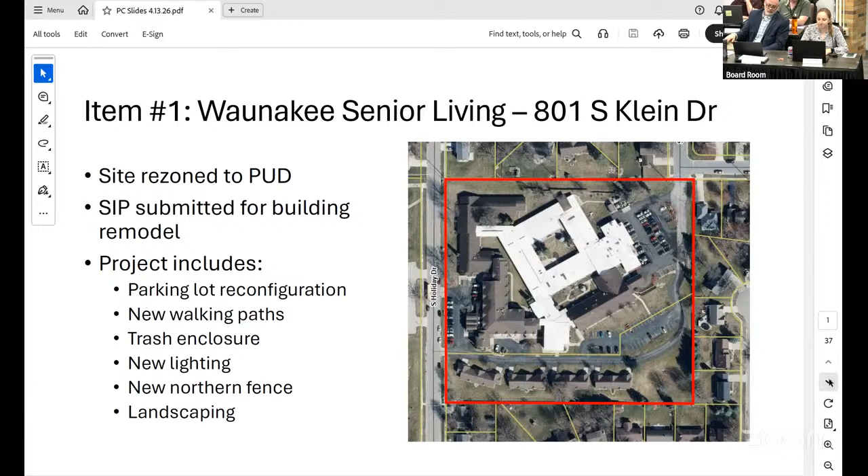I think you've seen this before, but this is kind of a very zoomed out version of the site plan itself. As you can see, there's no additions to the buildings, but there are some reconfigurations inside with these kind of courtyard areas, as well as the parking lot will look a little bit different than what it currently looks like, and also some new walking paths throughout the campus.

I also included kind of zoomed in versions of the 4 quadrants that were included in the site plan so you can better see exactly what's going on here. The major change in this southwest quadrant is this kind of entrance area - it's a drop-off area for the facility, as well as some additional walking paths.

And then the southeast area, the parking lot has changed a little bit, and there's a stormwater management area here in the middle, as well as additional walking paths.

And then in the northeast section, the parking lot is reconfigured again. Currently, it's kind of one block. Now it has a stormwater management area in the middle of those 2 parking areas, as well as a kind of pedestrian connection from the development up to walking paths, including this northern sidewalk that was mentioned by some of the public comments here. That does not exist currently, and so that would be an addition as part of the project.

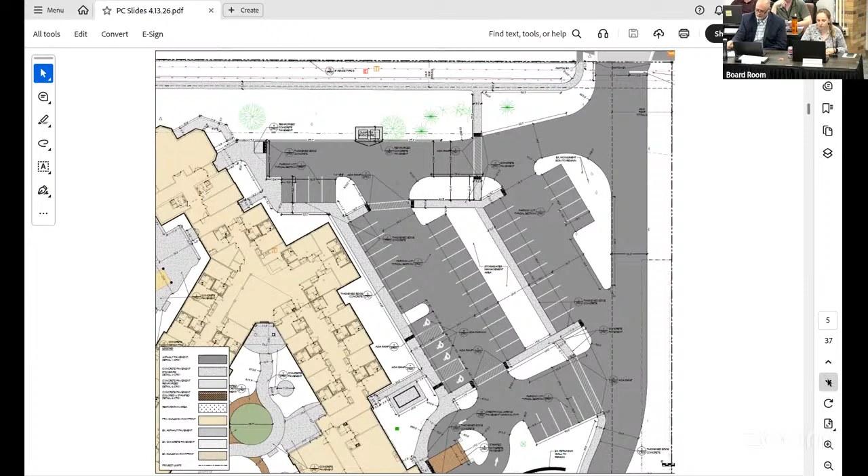And then the northwest section of the site plan, not a whole lot of difference other than, again, that sidewalk to the north.

I'll also add that they are doing quite a few exterior improvements to the building. They're adding all new siding, and they're redoing the roof as well. So it'll be a nice enhancement to the building.

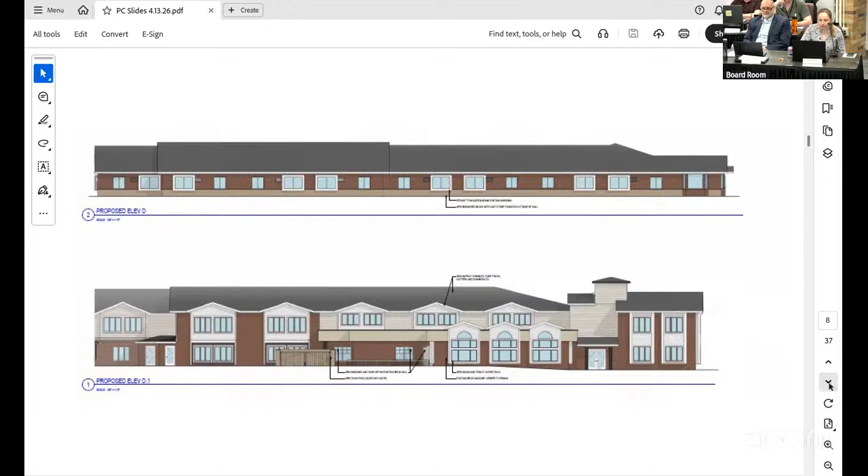So here's some more exterior elevations for the project.

In my comments in the staff memo, I mentioned I didn't have the photometrics at the time of the packet, but I do have them now. They look good, meeting the foot candle requirement for the property boundary of 0.4, and the proposed light poles are within the 18-foot height restriction required adjacent to a residential neighborhood. Staff think the photometrics look good to go.

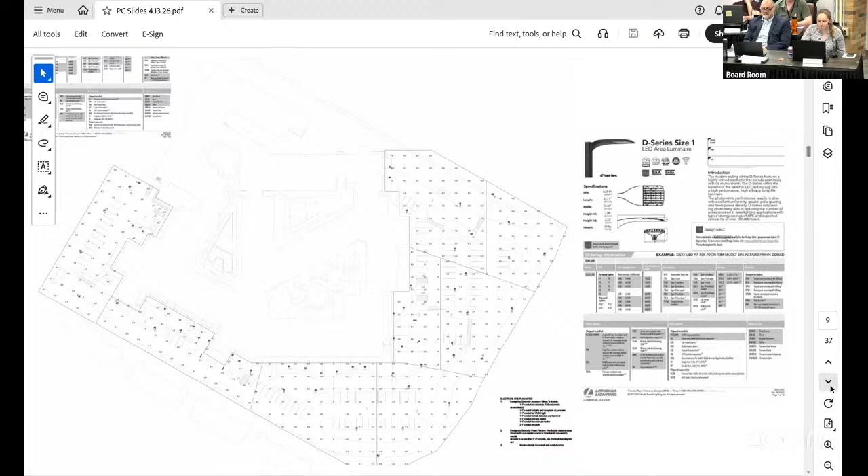The remaining planning comments: on the northern section of the property there are overhead electricity lines as part of an ATC easement. We're still awaiting ATC approval for some of the proposed landscaping work and the sidewalk. They have gotten approval for the new fence going in, but are working through additional details with the landscaping and sidewalk, so we'd want that approval before final sign off for the building permit.

We'd also like to see a CSM come back to combine the two parcels on the campus. That was discussed during the rezoning of the PUD, and it makes sense for this property. They've already prepared the CSM and submitted it to us, so that will come at a future meeting, but we want approval to be subject to that CSM approval.

They also noted today that they'll need to move the trash enclosure location. It's currently in the ATC easement, and they got word from ATC that they can't have it there. Staff can approve that, working with the developer on that piece, if the Plan Commission is comfortable with it.

The only engineering comment is that we will need a stormwater maintenance agreement signed and recorded for this property. They've already submitted stormwater management plans, and those have all been approved by the village engineer for meeting village standards.

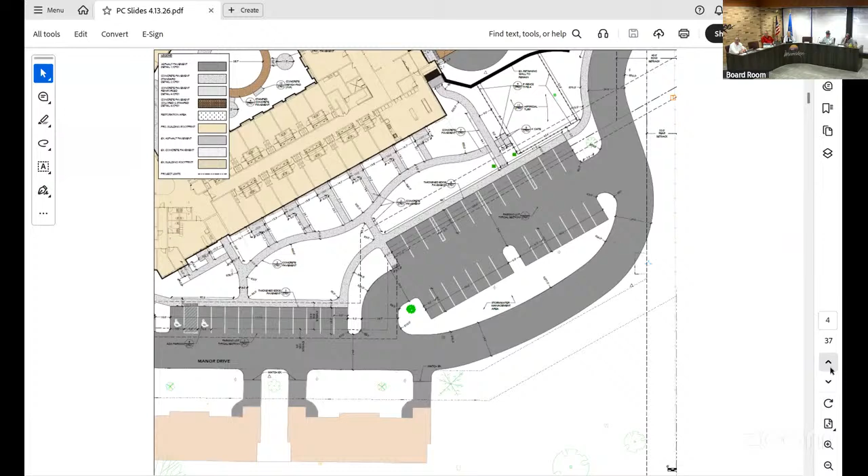Hi, I'm Jenny Decken. I'm from Erdman, the architecture and engineering company that's been working with Trilogy for about the last year to plan out this multi-phased reconstruction of the building. Also included here we've got Joe from Trilogy and Katie from Parkitecture, the civil and landscape team, so if you've got any questions, they're here as well to speak.

I wanted to point out some of the small changes that happened since the initial Plan Commission meeting. We've made an adjustment along the north property line based on conversations with neighbors concerned about privacy. A 6-foot-high fence is now running all along the north property line to give more privacy between the two buildings, along with the new sidewalk going in.

We've also changed the location of the generator on site. It used to be up in the northeast corner, near the trash enclosure area. We're going to move it more centrally to the east property line, and change it over from diesel to natural gas, in response to comments about noise and fumes complaints. Updating to a brand new natural gas generator will help with the noise in that location.

The other big change was the site lighting. Right now the lighting on site has been cobbled together over the years as building additions went up, so we're proposing to remove all the existing site lighting and replace it with completely new site lighting poles. That should help with some of the cutoff and light spill the neighbors may be experiencing right now.

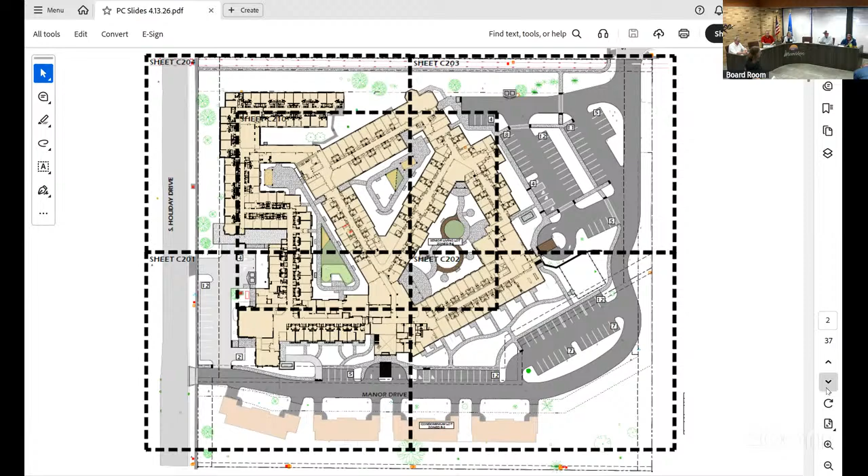Thank you, I appreciate it. For the neighbors that are here, anything else that you guys need, please feel free to email us and we'll get you the questions answered as soon as we can. But we appreciate you coming tonight.

Next up, page 38, discuss and take action on Heritage Hills 8th Addition. Final plat for final action by the village board. Lauren?

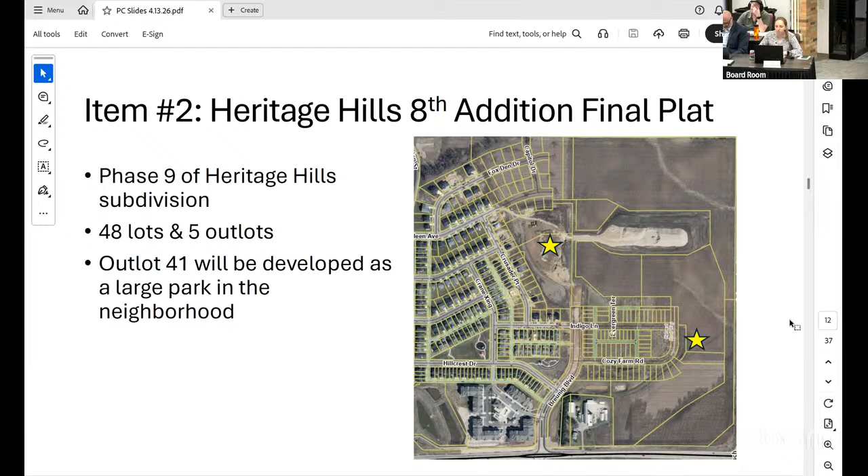This is phase 9 of the Heritage Hills subdivision. This final plat includes 48 lots and 5 outlots, and outlot 41 will be developed as a large park in the Heritage Hills neighborhood. I've got some zoomed out plats here, but we can zoom in if you have specific questions. These are the 2 pages of the plat that show the lot development as well as the large park outlot 41 as part of this.

A couple planning comments: when this comes to village board, it will need a development agreement as well, which we are working through with them currently. Just a minor comment that the dates should be updated to 2026. So staff do recommend approval of this final plat, and as Kristen mentioned, this would go to village board where they would approve the final plat and development agreement together. Do you guys want to give us an overview?

Good evening. My name is Dan Day from D'Onofrio Kottke and Associates, representing Veridian Homes here this evening. Just here for phase 9, as you all say. How did we get here this fast, right? We've been here quite a bit, but again, we're developing 40 some lots.

This year with this phase, a few on the north side of the park, along with more on the east side abutting Schumacher. The improvements this year will be the area on the left-hand side, plus an area up on the north side end of the park. We will not be connecting Brining in yet this year; that'll probably be a next year construction project to bring those two together.

We are dedicating the full formal community park in the center though with this plat, so that will be formally dedicated. And we are planning on phasing in some of the improvements to the community park this year into next year, getting that ready to go for the spring of '27 for full completion of the park.

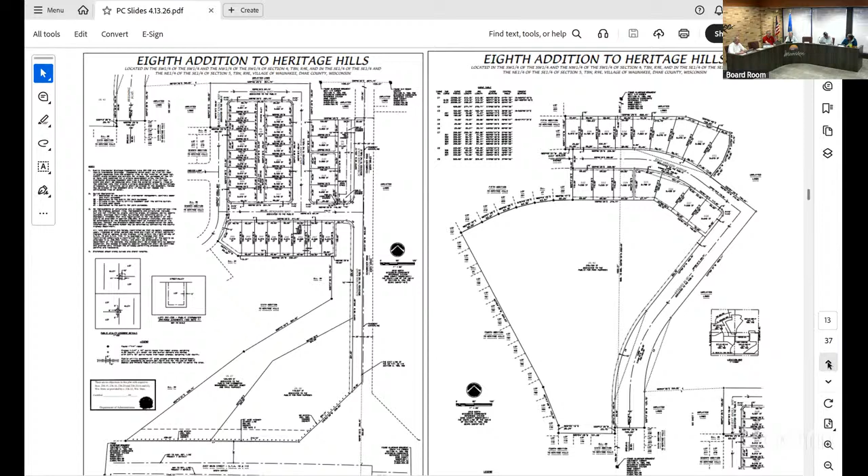Brian? And by motion to approve, you guys mean recommend approval to the village board? Recommend approval to the, yeah. All right, second? Still good? All right, all in favor? Aye. Opposed? Motion carries. All right, thank you very much for coming tonight.

And next up, item number 3, discuss and take action on a certified survey map, CSM, at Bruenig Boulevard and East Main, for final action by the village board, page 43.

Back to you, Lauren. All right, so as you said, this is a CSM for the Bruenig Boulevard and East Main Street. It's one lot and one outlot. The outlot is dedicated for stormwater management, sanitary sewer, and trail purposes. Staff comments have been addressed, we recommend approval.

Do we have any questions on this? Melissa? Brian? Chris? Mike? Nope. Nope. All right, then I will make a motion to recommend approval of the CSM to the village board.

Second. Any discussion on the motion? Seeing none, all in favor? Aye. Opposed? Motion carries. Then next up, page 103, discuss and take action on... wait, no, I skipped one, didn't I?

Discuss and take action on specific implementation plan for Azura Memory Care at Bruenig Boulevard and Main Street, page 48. And this is for final action by Plan Commission.

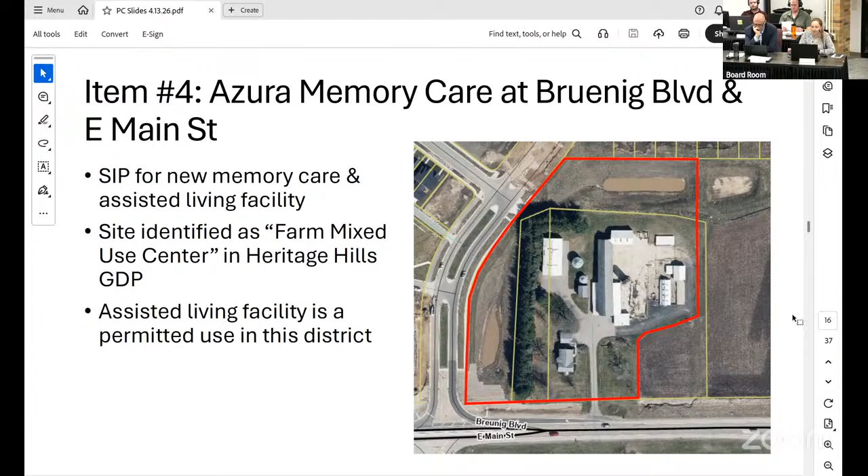This is a specific implementation plan for a new memory care and assisted living facility at this property. The site is identified as Farm Mixed Use Center in the Heritage Hills GDP. This assisted living facility is a permitted use in that district. Just a little bit more about the Farm Mixed Use Center designation.

It was really designated for this property in particular because it is the Bruenig family farm. It was identified in the GDP that it would feature farm-style architecture to highlight the heritage of the farm. The developer is required to submit documentation to support the infeasibility of adaptive reuse of the current farm buildings in order to demolish them. The developer will provide a few presentation slides, and they'll include that as part of their presentation.

So the site plan is here. You can see the memory care and assisted living facility is kind of the eye on the site, as well as the parking that's included here and down here, as well as underground parking. And then there are paths throughout the site.

One thing I want to mention, as you all know, we do staff review, usually two rounds of staff review before site plans come. We had a special meeting with public safety professionals as well, so we had fire and EMS weigh in on this project, given the nature of the clientele they're serving. Just wanted to mention that as an important part of this project.

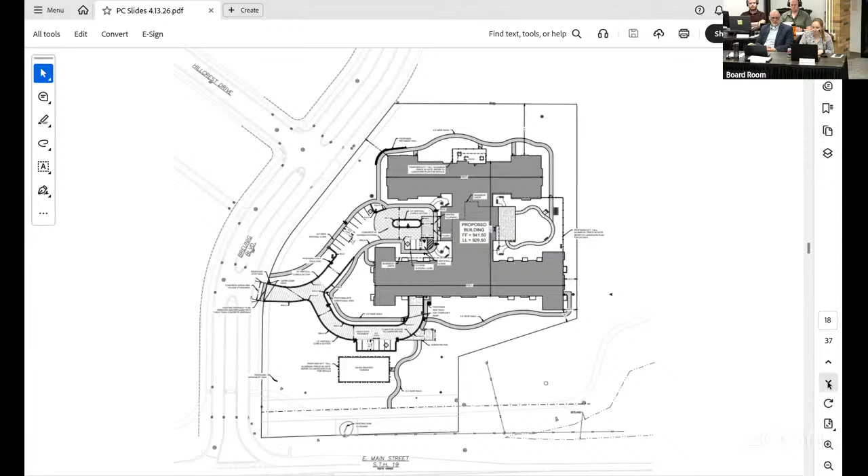Also including the landscaping plan, they exceed our landscaping requirements. It's a really well landscaped site. I know Tim mentions in his memo that generally we like to see landscaping help cover parking spaces, but I'll note that the parking up here to the northwest has a pretty steep grade change. So there's a few trees proposed, but you're not going to be able to see the parking from the road anyway.

One other thing I wanted to note, I know in Tim's memo he talked about moving landscaping on this southeast corner. The original proposal actually had it slightly on the stormwater facility. Since Tim made that comment, those have been moved out of the stormwater facility, so they're all on the property now.

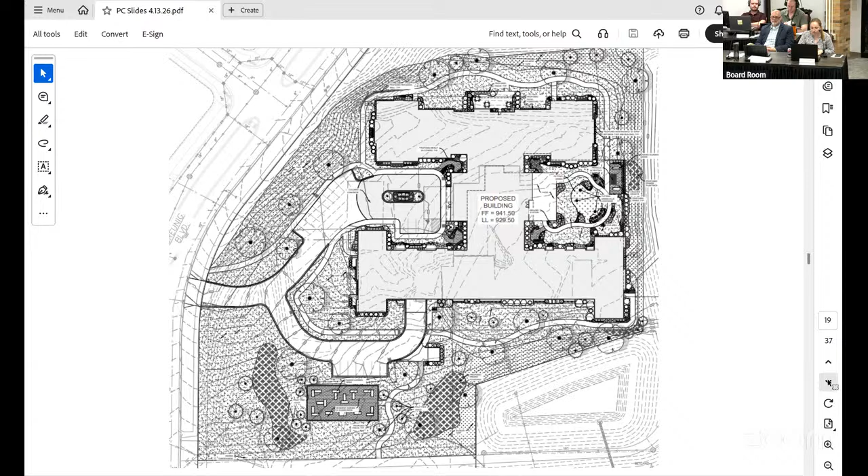Included some elevations for this project. If you've seen the Bruenig family farm, you'll note that they're trying to pay homage to those buildings with the white farm style here. I'm sure they'll touch on that more in their presentation. Here's another elevation as well.

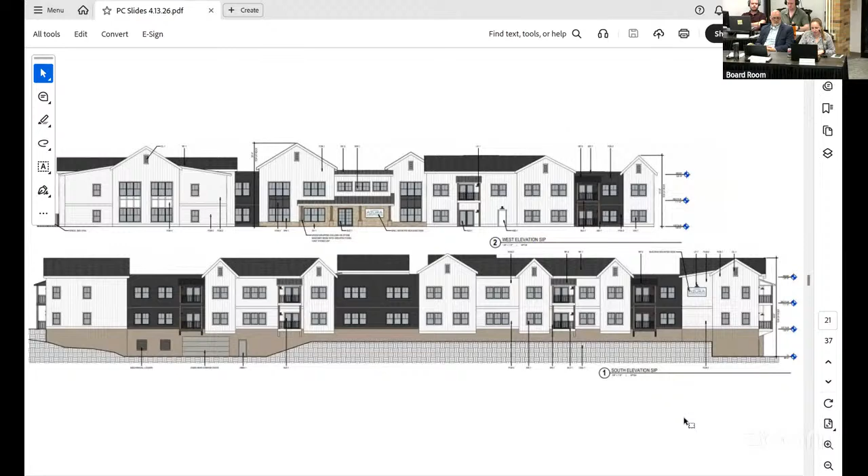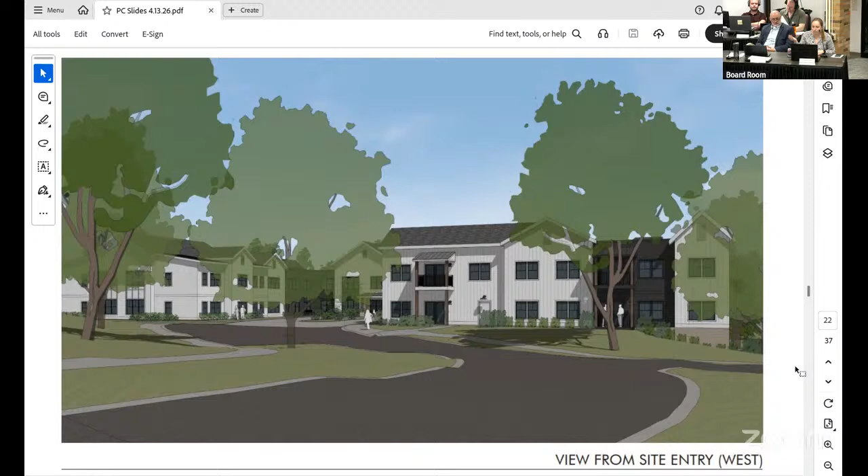They also included several renderings of what the facility will look like, especially with mature trees that will eventually grow as part of their landscaping plan. So included a few perspectives of the site. Here's the view from site entry, west.

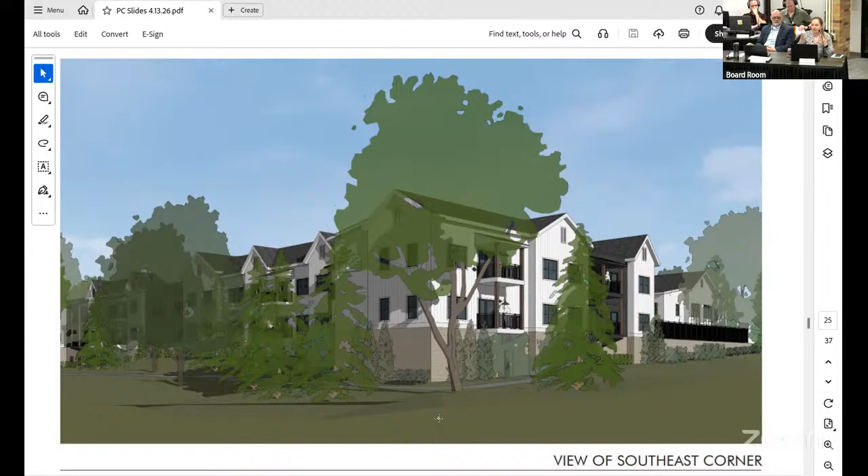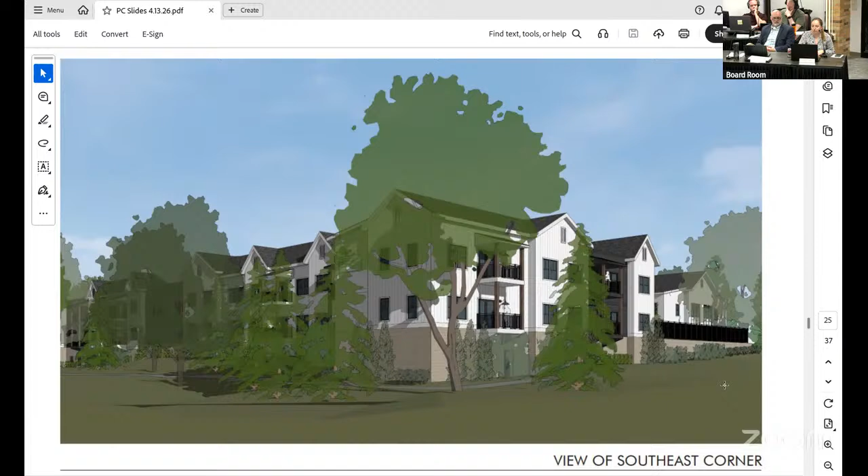I did want to mention the southeast corner. That was one item that Tim talked about in his memo. There's quite a bit of what they call CMUs, a pretty tall portion of this building that Tim had a little bit of aesthetic concern about. He brought up some suggestions for how to address that. I think the developer prefers to just have landscaping be the way that wall is buffered, and I'll show you those examples, but I think in general this is the hope of what that southeast corner would look like.

So for the remaining planning comments, Tim had suggested a drop shadow, and I have a picture of that in the next slide. The developer would like to not do that for several reasons, and I'll let them explain. They think that once the landscaping matures, by not doing that it will allow the top portion of the building to shine in the architecture instead of drawing people's attention toward the bottom of the building.

And then the other comment was providing final details on a monument sign. I believe they've already put together some information on that they'll share.

For engineering comments, there are several remaining engineering items. I think all of them are fairly minor and can be worked through at a staff level. So if the Plan Commission did want to approve this tonight, they could, with the condition that they'd work through those items with staff.

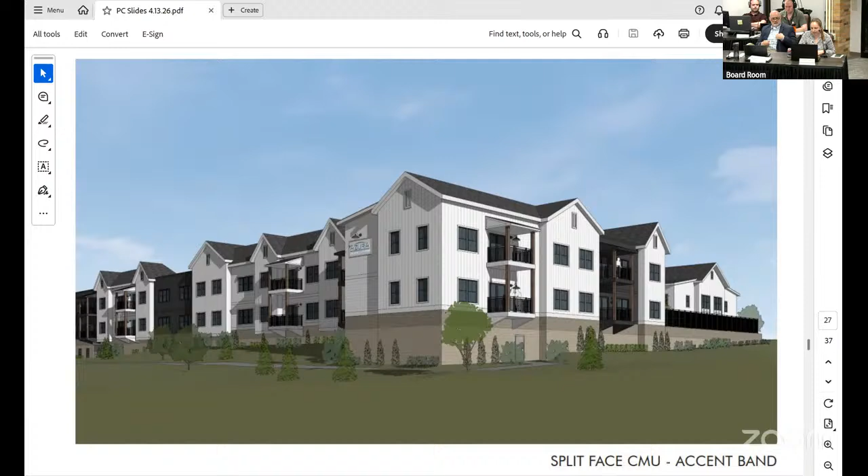And then here is the drop shadow effect on the CMU that Tim had proposed, just so you can see the difference between the two options. Staff recommend approval of this SIP conditioned upon resolution of those remaining comments.

All right. Thank you. And would you guys like to say anything? Yeah.

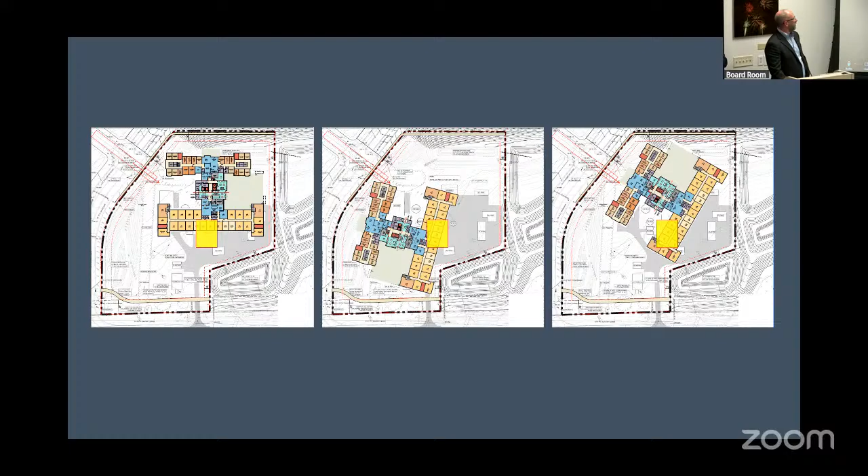The left version here is the community that is proposed. In this slide, you can see with the access in our driveway down to the parking garage, as well as our resident gardens and everything else, there's just really not an ability, especially given grading and everything else, to maintain those buildings. So unfortunately, those would need to be demolished in this case. I love farms too, so I hate to see that happen. We did do diligent effort to try to make sure we could save those, but unfortunately that was not the case here.

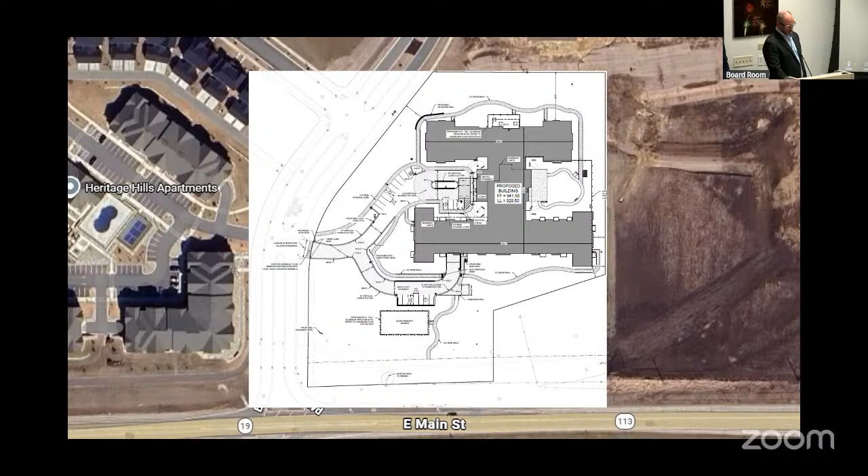As far as the architectural design goes, if there's questions, I know I'm taking a little bit of time here, so I don't want to go too far, but we did an in-depth analysis and made sure that the forms, the colors, the materials, and specifically the roof lines were carried through to the new building. So being very deliberate about trying to maintain the aesthetic of the historical buildings into the new building.

We did bring sample materials if you guys would like to see them. Yeah, that'd be great. Bring those up.

I think one of the key things to note is, Saul, do you want to hold up the CMU sample? The top one. So that's a concrete masonry unit, which is what CMU stands for. And these are, we would be using split face CMU, which has a stone appearance in a buff color.

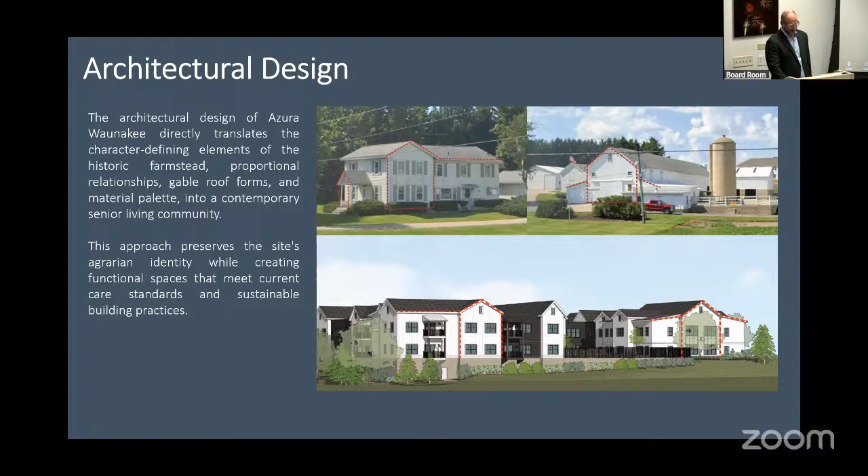Is that getting a nod of approval from the architects?

Getting into the elevations, this is showing some of the building elevations with, was drop shadow the correct word, the recommended drop shadow, versus what we're requesting for approval and just having a single color. One thing to mention with this alternate color is it does introduce some construction issues in that you're really only going to have one grout color on that wall. So in order to do two colors on a single wall, you're going to end up with dark blocks that have a light grout or light blocks that have a dark grout, which is going to draw more attention to those, in addition to this kind of drawing your eye to that shadow line.

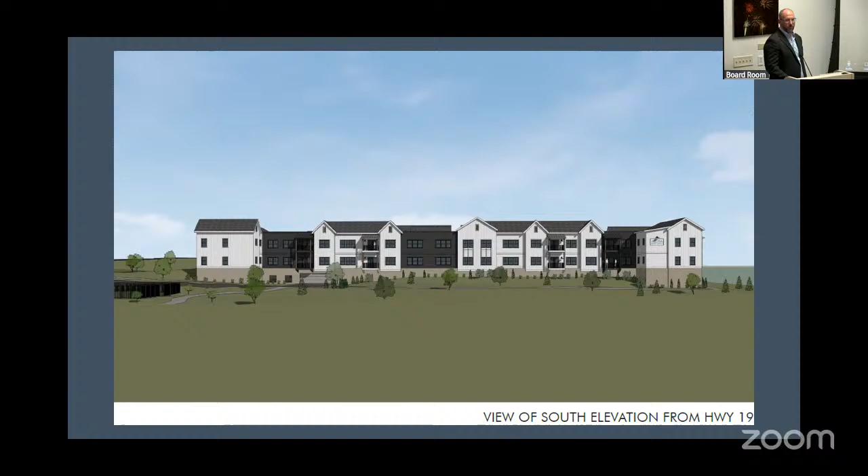Whereas the proposed building with one color, it is a little bit more visible in this situation, but we feel like long-term it's going to be the better option. We also did reduce the amount of CMU by about 30% from our initial submission to where we are now, through changes in grading and landscaping as well.

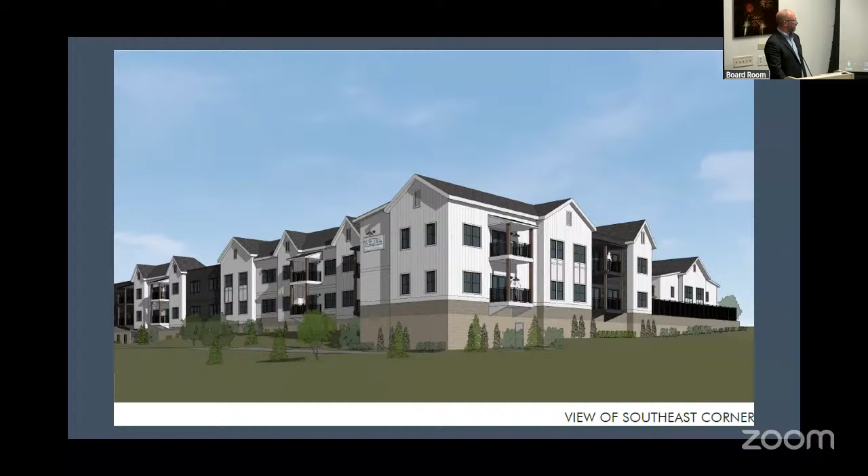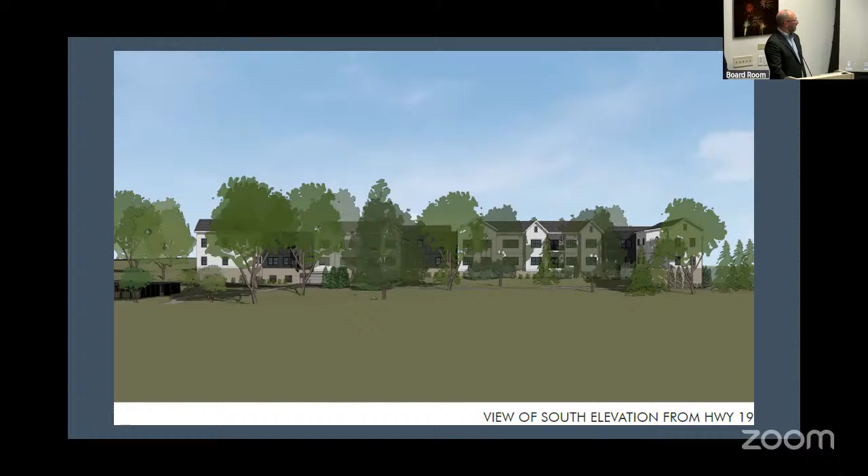This corner is the close-up of the southeast corner, again showing the recommended versus the proposed options. And this is the view from Main Street looking at that southeast corner, so you're quite a bit further away with both options. And again, the landscaping at maturity really screens your visual of that area as well.

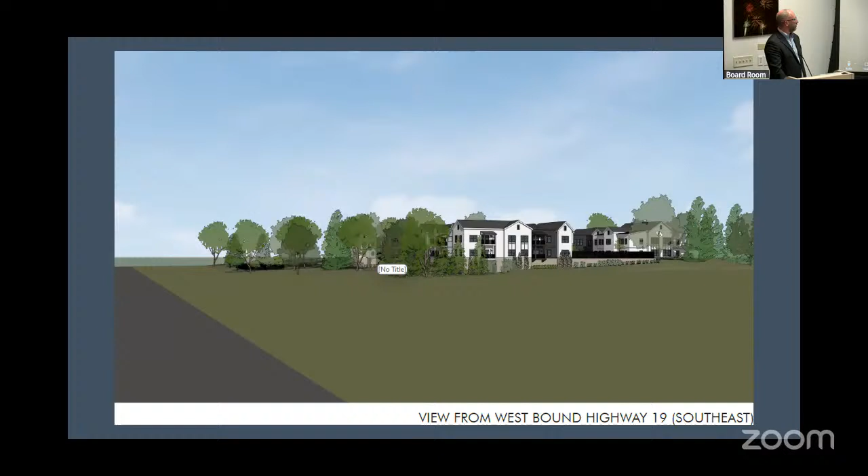For parking and traffic, just emphasizing, we do have 91 total stalls, I believe 24 on the surface and the remainder in the parking garage. In the report that was provided, the total number of needed or required stalls was listed at 86. That was with a 1-to-1 ratio for our assisted living units.

In all of our portfolio, less than 10% of our residents actually drive. So if you use the lower requirement of one parking stall for 6 residents, that need would only be 48. In any event, we're providing 91 stalls, but from our experience, 91 is an amount that would cover all of the parking needs, even on holidays and when we have larger amounts of visitors and those sorts of things.

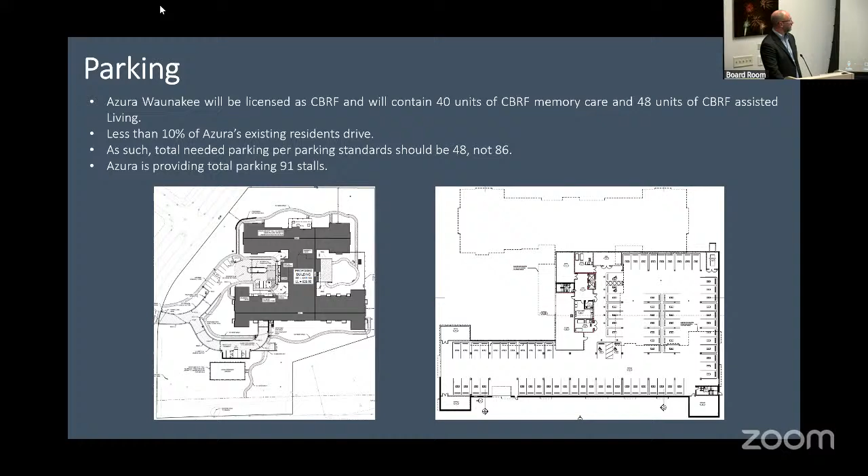With traffic, the key note here is that the original development plan assumed commercial use with a net of 60 to 75 cars per day. Our use is anticipated to have a total of approximately 30 peak hour vehicle trips, so we're about 30 to 45 less than what was in the original plan — about half.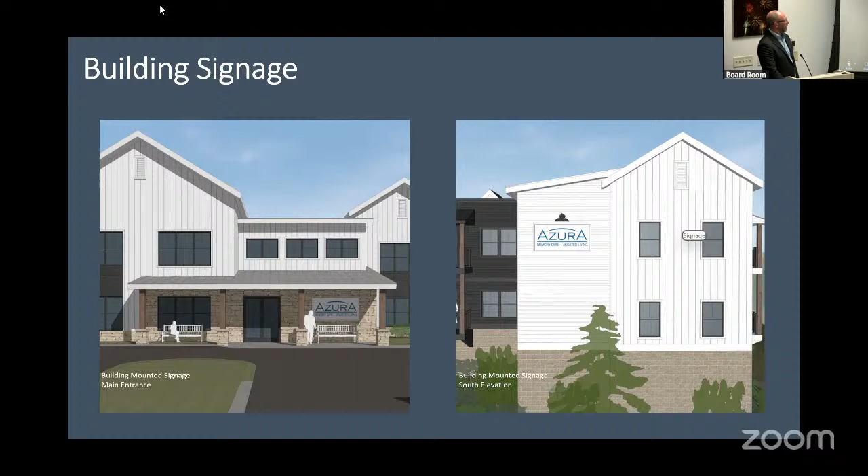We did request to have some building signage, which these images show. One is underneath the awning at the main entrance, which isn't visible from any public ways. The other sign is on the siding at the southeast corner, which would just have a downlight over the top. For the monument sign, we're assuming a 4x8 monument sign that would match the size and location of the apartment monument sign across Braunig Blvd.

We are investigating naming the building, naming the community after the name of the existing farm. So there are some things we need to figure out, like permissions from the family and those sorts of things. If that is done, we're requesting that the 4x8 requirement be applied to the Azura sign and not the additional lettering naming the community, and we'd like to request approval for the general size and location, allowing staff to do a final review and approval.

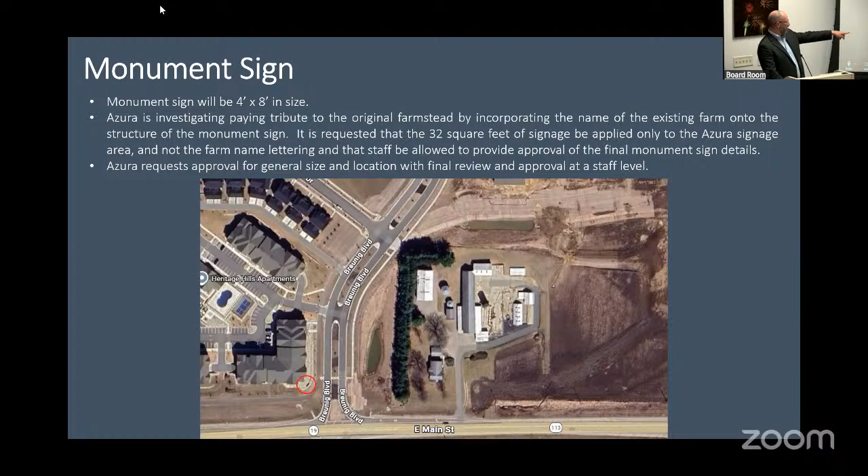The red circle down here on the bottom left is the location of the apartment monument sign. This is our site plan overlaid, and then the proposed location of our monument sign, which would be just to the north of where the path comes across the street and then follows along Main Street.

As far as city services go, this is just something I'd like to provide. In 2025, we reached out to Chief Whitaker from North Shore Fire, asking about the total number of calls and those sort of things. The key issue they key on is the number of fall calls for fall assist. At the bottom of this email, the number of actual fall calls received on Azura Fox Point, which is actually 80 memory care units, was 3 in our first 2 years of operations and 1 in the previous 2 years.

So we do provide adequate staffing. We train our staff how to do lifts and assists, and we do 2-person assists. We have Hoyers and sit-to-stand equipment, so we're capable of providing those lift assists, and we don't make outbound calls for those. That's the information I have prepared. I'm happy to answer any questions, and architects are here to answer questions as well. Thank you for your consideration.

Great, let's open it up to the floor. Melissa, do you want to start?

No, I think that was really thorough. There's a huge need — the data we've seen, looking at the comp plan, and the information you shared, shows we still don't have enough even with this going in. I'd be confident with approval, comfortable recognizing that any engineering comments are addressed. Regarding Tim's suggestion, I actually don't like it — I like the way it is. Frankly, after 4 to 5 years, you're not going to see anything anyway once the trees and shrubs are grown in, so I don't think we should recommend that. I don't think there were any other major concerns, so that's all I had.

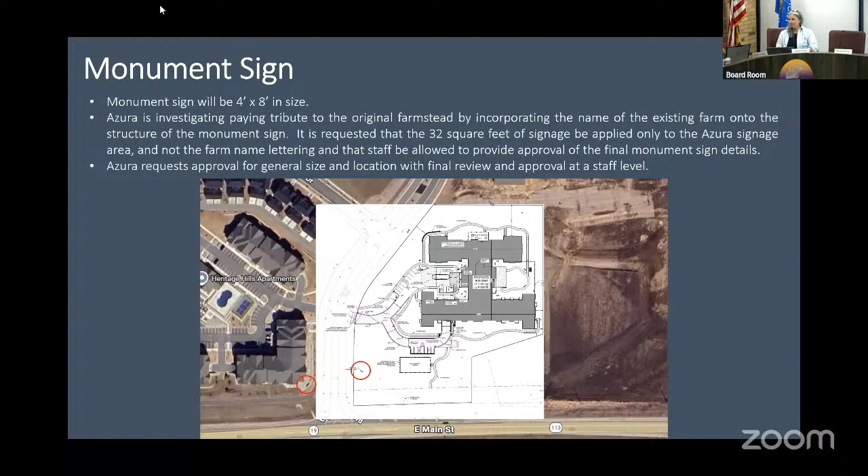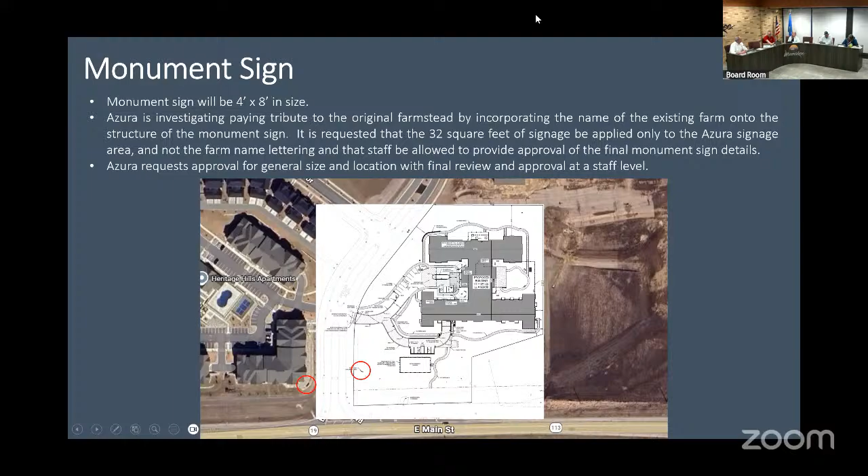With that, does anyone have other comments? Seeing none, I'd like to make a motion to approve the SIP subject to resolution of the remaining planning and engineering comments. Second. Any discussion on the motion? Seeing none, all in favor? Aye. Opposed? Motion carries. Thank you, thanks very much.

All right, the last item on the list, page 103, or second to last item: Joint Plan Commission update—discuss and take action on a preliminary plat and rezoning for Heyday.

This is a preliminary plat and rezoning for the Heyday project. I believe a concept plan came to you all a number of months ago, maybe last summer—back in July of 2025. The rezoning request would rezone from A1 to Planned Unit Development (PUD). The proposed subdivision includes 114 single-story rental homes, 36 two-story rental townhomes, and 53 single-family lots.

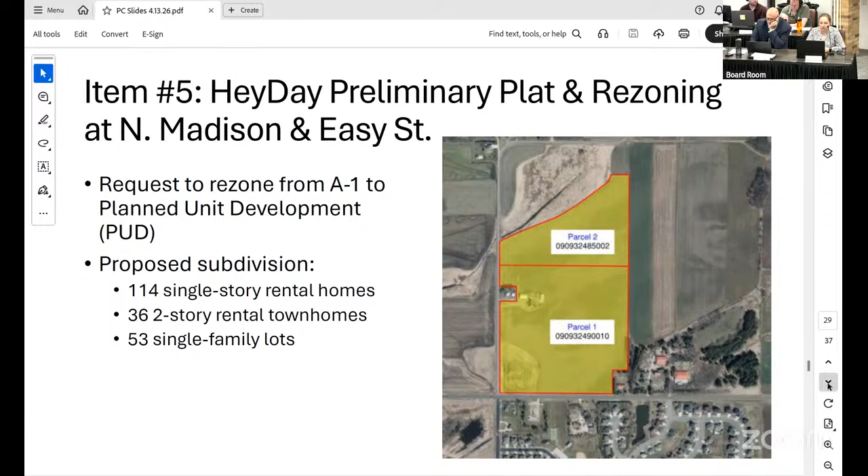This is the overall master plan included in their materials. The single-family lots are on the south side of the development. As you might recall, this is flipped, so Plan North is actually east. So single-family lots are on the south side of the site, and the northern side has the rental townhomes and single-story homes.

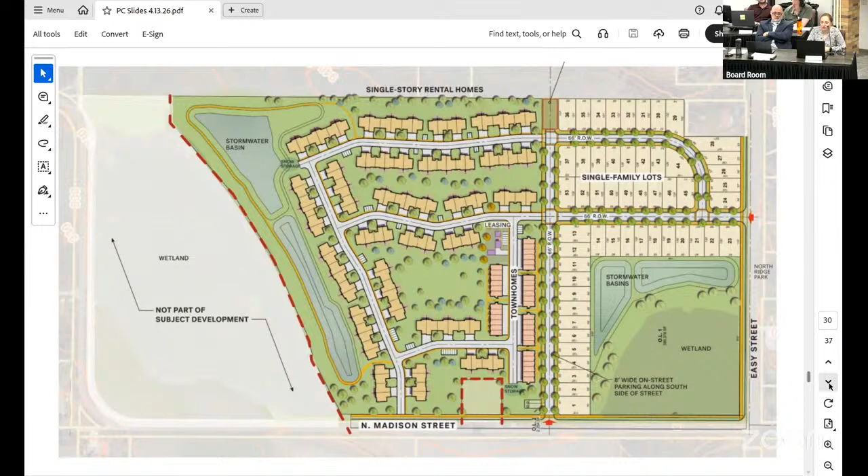The preliminary plat includes 54 lots and 2 outlots. Lots 1 through 53 are the single-family lots, and lot 54 is all private, which will include all of the rental units. Outlot 1 is dedicated for stormwater management, and outlot 2, right here, is where the sanitary lift station will be located.

In terms of the preliminary plat, the only remaining planning comment is that we would request no vehicular access on lot 1 along North Madison Street. You'll notice we have no vehicular access along Easy Street on lots 24 through 27—we want those driveways to come off Piper Place. We request the same for lot 1 off Madison Street, so it comes off Jordan Avenue instead.

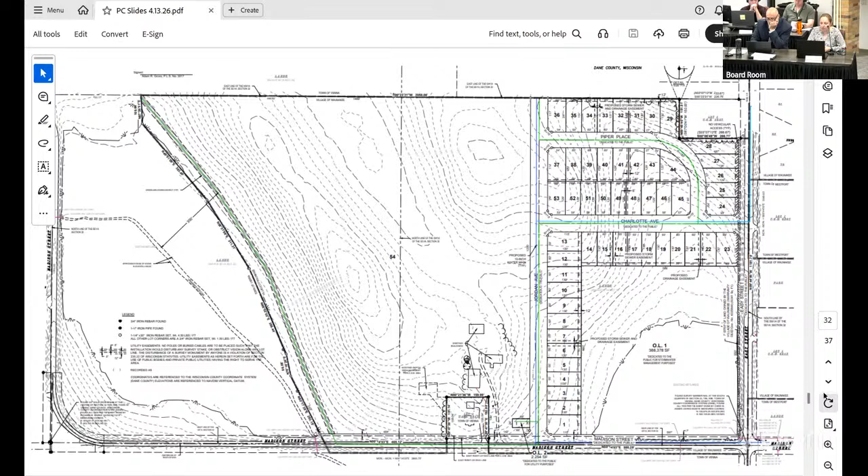I'll also go over the general development plan, then we can return to the preliminary plat for questions. Generally with GDPs, we adopt one of the zoning code standards in our current zoning code and then make modifications. This GDP would adopt R2, single-family residential district. The modifications to R2 include permitted uses modified to allow single-family attached dwellings with up to 6 units per structure. The minimum lot area would be reduced from 8,500 to 7,000 square feet, and the minimum lot width reduced from 70 feet to 50 feet.

The other item of discussion with the GDP includes the green/open space element of this project. The developer is proposing a 2.14 acre private central green, which would be the programmed gathering space, plus additional green spaces throughout the rental development functioning as passive park areas.

The project also proposes 10-foot multi-use paths along North Madison, as well as a gravel walking path that winds through the northern edge of the site. I'll show that here—you can see in the central area, that's the 2.14 acre private park.

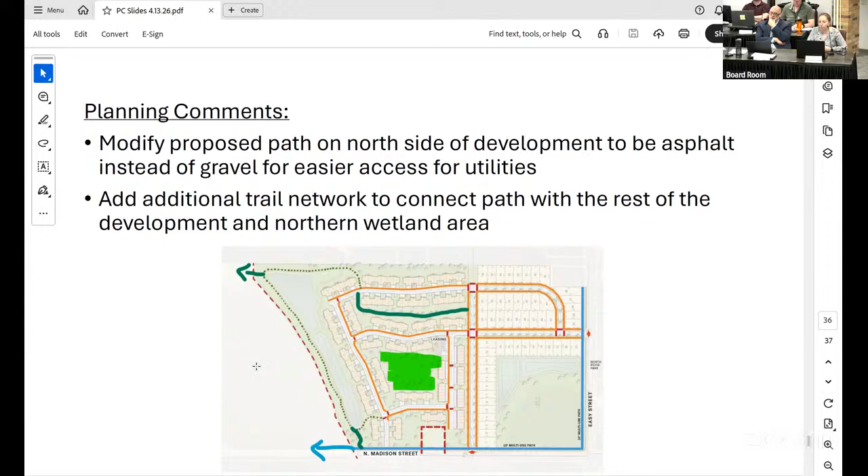Staff recommend approval conditioned upon the resolution of these planning comments. Next steps for this project would be going to the village board, who would approve the preliminary plat, the rezoning, and a development agreement as part of this project.

All right. Hi, okay, yeah—Lauren, I think I should be able to share, right? Let's see here. I don't see a share option.

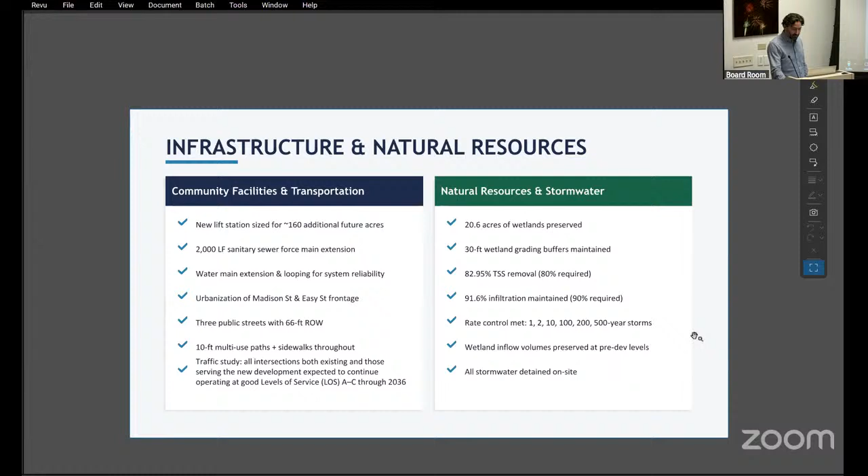Natural resources and stormwater that we'll either be preserving. There's 20.6 acres of wetlands that I'll show on a map shortly that we will not be disturbing, but for the improvements on Easy and Madison. We'll be maintaining all of the necessary buffers and all of the stormwater requirements talked about earlier today. In a different development, we're obviously held to those same standards, and we are meeting or exceeding those in all cases. And we do have our civil engineer if there's any questions on that as well.

So what we heard and how we responded in an earlier version of the plan, and this is what we've built in our first 2 projects, we had 22-foot streets, 24-foot back-of-curb to back-of-curb. That's not code here. We had proposed keeping it because we can show that on those 22-foot streets, there's no parking allowed, so traversing those streets with emergency services vehicles is without concern. However, it didn't sound like that was something staff was going to support, so we redesigned the site a little bit, and we've now put 32 face-to-face on all of our private roads.

A traffic study was commissioned. There were no major concerns about traffic at these locations, but any of the minor suggestions in the traffic study will be adopted. I had mentioned the stormwater and the 10-foot multipaths. Landscaping is preliminary right now, but we will be meeting Waunakee standards for landscaping.

And then one thing I will highlight when I get to the actual plans, Ryan and I have had issues with our architecture in the past. It's an evolving thing, but over the course of feedback from residents, our own architects, and meeting with staff in different municipalities, we've really dramatically changed the architecture. How we did that was we previously didn't have front doors on the street-facing side of our homes, with the logic being we really wanted a sense of community and wanted the front doors facing open spaces.

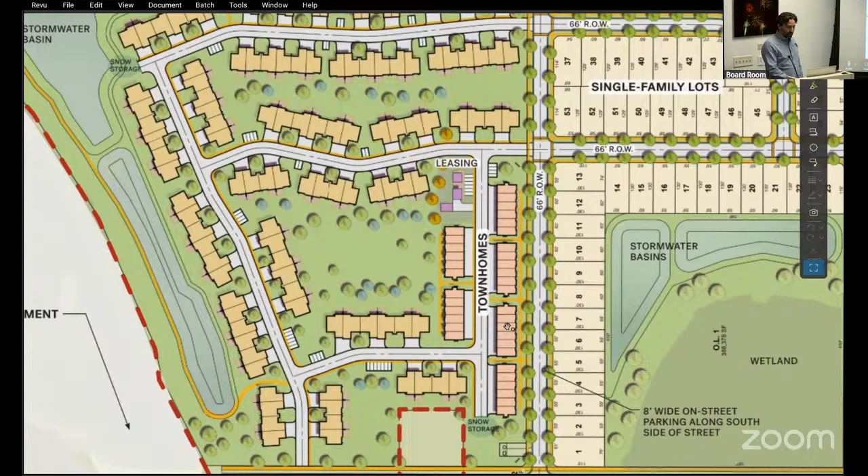Steve had some really good suggestions to the site plan, and we incorporated both of them. One important one was that previously, on our public streets, we had our product - the single-story cottages - facing the public street like this. Steve suggested that if you fronted the townhomes on the public street instead, you'd create a much better sense of community. When he suggested it, it was obvious we should have done that in the first iteration, so we changed it, and now all our townhouses are on this side of the development.

I have a rendering that'll show you what that'll look like.

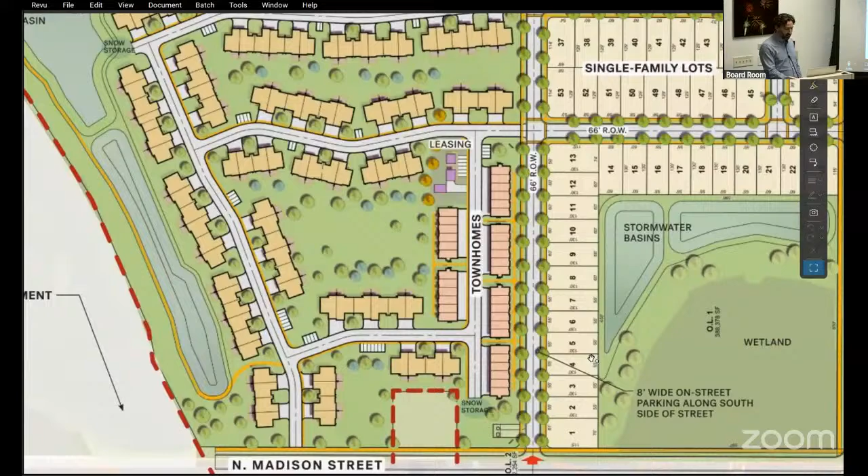As part of our working with staff, we had tried very hard to buy this parcel. Unfortunately, despite meeting with this gentleman, who was a really nice man, sitting down with him at Waunakee and agreeing to a price - he made a suggestion, we said that's great, happy to buy your house for that - we sent him a contract and didn't hear from him for a couple weeks. Finally got in touch and he had changed his mind. So it's unfortunate, we very much wanted to incorporate that into the project, but it doesn't appear to be possible.

Figure out how to zoom out.

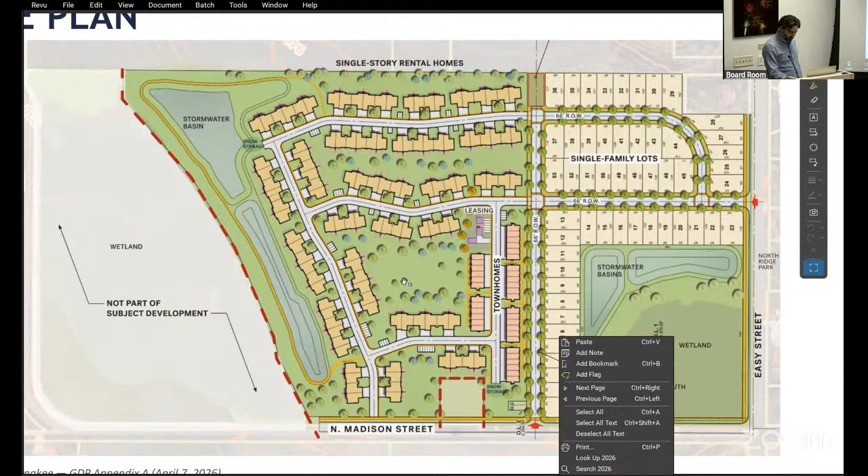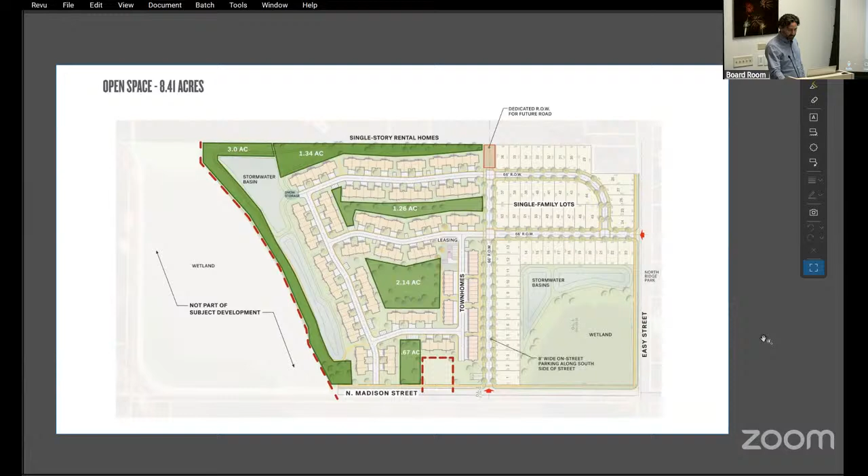I had mentioned the open space - this is approximately 8.4 acres of activated open space. This is where we'll have trails and the 2.14 acre central green. None of these spaces will be activated like a park in the sense of basketball courts or baseball fields, but they will be activated through benches and passive activity where people can gather and sit. We feel like with North Ridge across the street and a couple other parks very close by, this is a better use of the space as opposed to activating it with courts and whatnot.

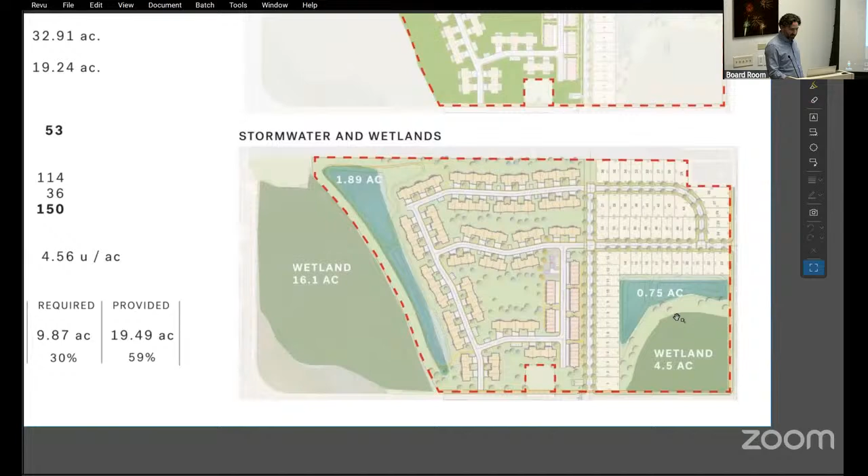So again, this map shows you the open space - the green area that's about 59% of the project. This is our wetlands and stormwater areas that we are maintaining: the south wetlands at 4.5 acres, the north wetlands at 16.1 acres. Overall density, including the single family homes, we're at about 4.5 units per acre.

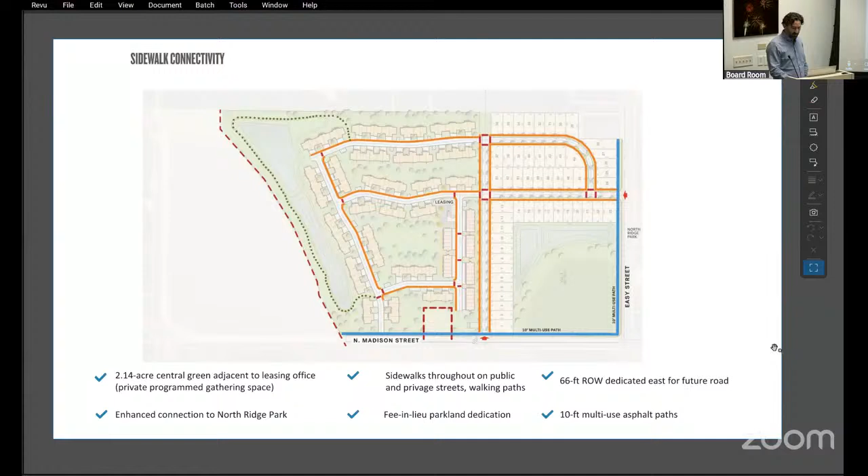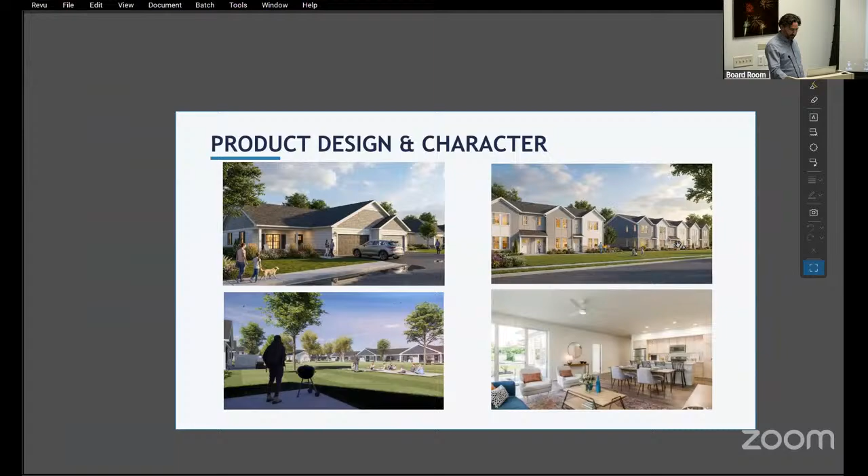All right, let's get into some product character. We never used to have a front door at this location and we didn't have a front porch, so these were just windows into bedrooms. By bringing the front door to this side of the home, we have really activated the front of the space.

Something else we did - if you look at our projects in Oak Creek or Sun Prairie, we only had a single version of the garage facade, which is a gabled roof with an element. We've now created three different garage presentations, which will occur on every building that has 6 units. A 4-unit building will just have 2 of the 3 examples, and I'll be showing those.

The third thing we did is extend this garage out approximately 2 feet from a standard 22-foot depth garage to get additional fenestration. This enhances the facade but also provides a 24-foot depth garage that can fit a full-size truck, which we think is really important. We've noticed in other communities, as well as ours, it's really hard to fit a Ford F-150 in - you can't for the most part, so people park on their 22-foot parking aprons. You won't need to do that at our community.

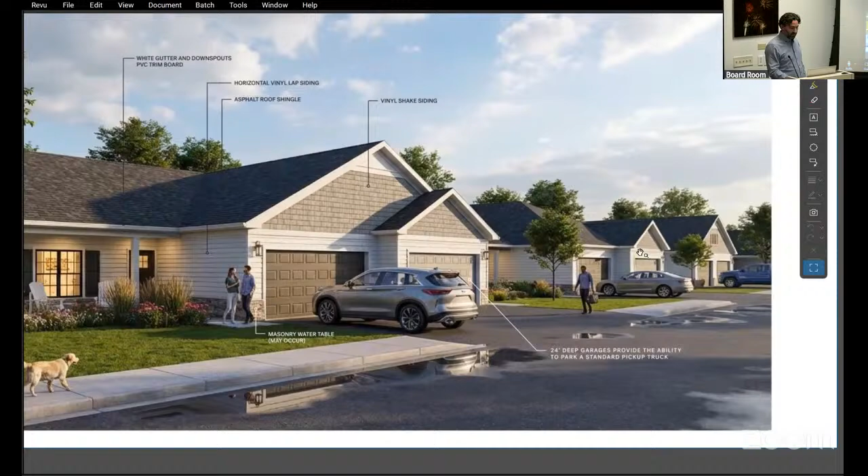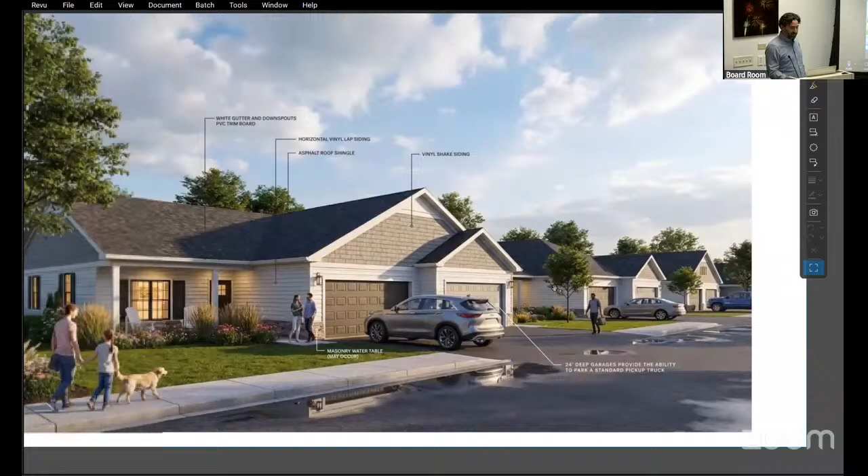So this is a larger gable with a smaller gable for the extended garage. Down at this elevation, you have a small gable with a hip. And the final elevation has the full-size gable over both garages. So you won't have the repetitious nature that you see in version 1 of the development.

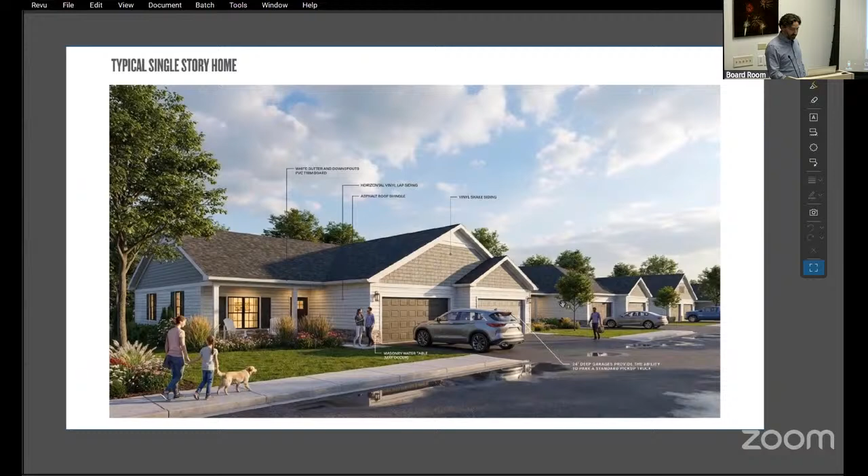Now I'm going to go through different renderings quickly of how this looks. On the next slides you'll see the same building in a different material palette - this one is a shake style in the gables with lap siding and a stone base, and here is a more traditional board and batten without a stone base.

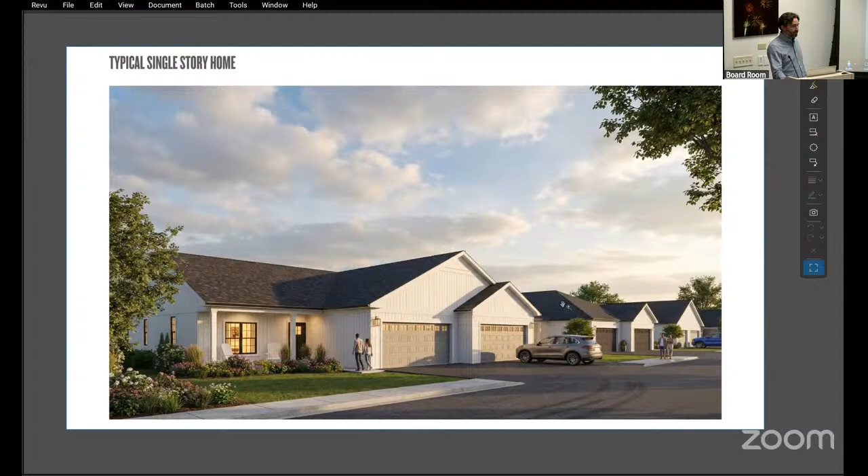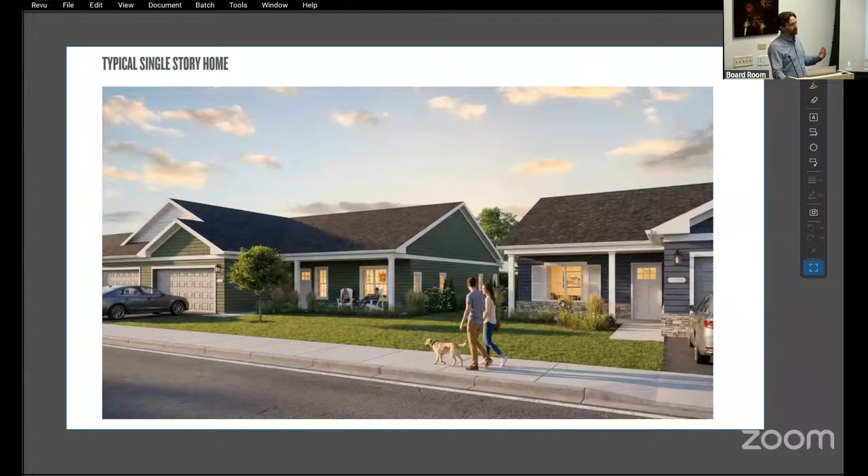Same kind of situation here, two different elevations of the same image. Throughout the community we'll change materiality, we'll change color, and you'll now have a change of roof lines as well. So it'll feel remarkably different, in addition to being activated by the front porches, than what we had done previously.

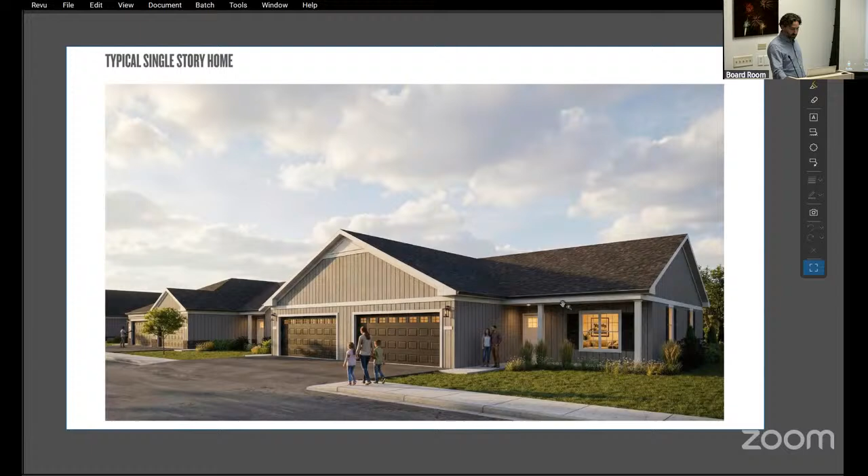And then this is the hip with the small gable, and this is what we had done previously with the single gable. We're really happy with how these have evolved, and hope you guys are too.

So our path forward: everything goes great tonight, we'll be at the village board next week regardless. We hope to hit the May 11th submittal for the PIP or SIP, and if everything goes well, we will be beginning construction midsummer, latest maybe early fall.

So with that, I thank you and open it up to questions. All right, thank you, and with that, what questions do we have? Melissa, can I start with you?

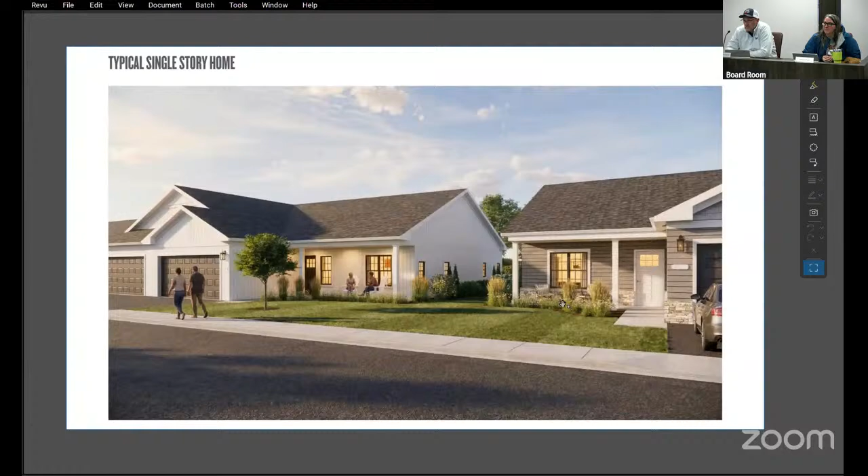And then I guess my only other question, I think everything else looks good. I understand the park sentiment - it's relatively speaking a smaller site, so to cram all that in and not put a park in... I guess my one question regards the trails. I think that dark green line that was parallel with Charlotte and Piper, it sounds like you guys were thinking about putting in, and it was on Lauren's map - maybe thinking about putting in trails and other things.

Yeah, I don't know if I think it's needed there. My one question is public access - are you going to have these marked as private trails for your residents only, and are you going to monitor that? Well, that's just it, right - even if we did that, it's not really something we could monitor, and we haven't done that in the past. I would venture to say it's open to the public unless there's some problem, and we don't foresee that being the case.

Yeah, I mean, and I agree, the payment in lieu of park fees plus impact fees, so I think that makes sense, and I understand why you don't want to do it here. I guess then my only question or concern back to you guys would be, if they don't really want public access ideally, do we really want to make that connection there? I mean, there are the 10-foot paths on Easy and Madison, and at this point you will never get rid of those kids on their scooters. Anyway, so I know it's a whole other hot topic, but from my perspective, my question would be more to staff - if the intent is not that it has public access, should we be...

I would almost say don't do the trail between - that's the long green line between Piper and Charlotte - but then do we really need to make the connection to Madison? I would assume from a liability perspective, they'd prefer you didn't. And if we're not saying it's public access, I don't know if we should force it - that's my two cents. Yeah, and I'll just add that I think there's flexibility in where exactly the trail network goes.

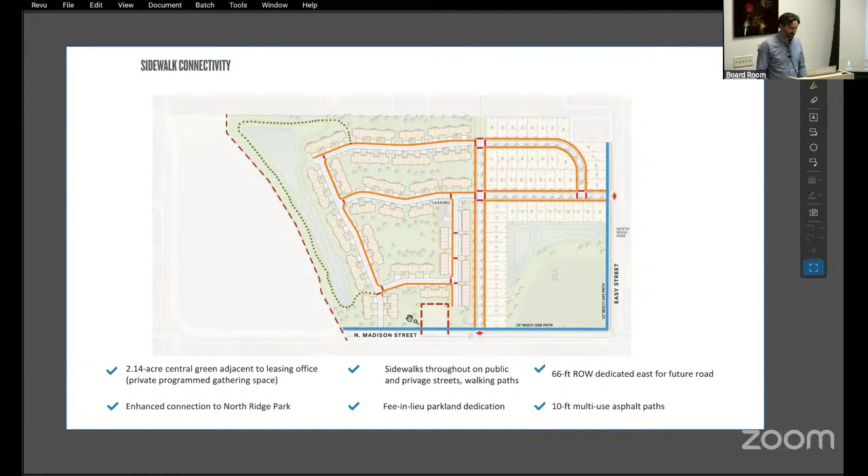That's kind of my only questions there. I guess that would be my two cents - maybe let you guys figure that whole part out. I don't think in our motion I'd want to force that. Thank you, let's ping pong.

Mike? I think your changes look really good, thank you, I don't have any questions. I think it's a nice project. Thanks, Brian?

I'm all for trail connectivity. That's one of the things in our comp plan as well, so whatever that connection is, I would defer to staff, but I think there should be some connectivity there, not only for this development but for potential future development, whether access is along Madison or through a green space.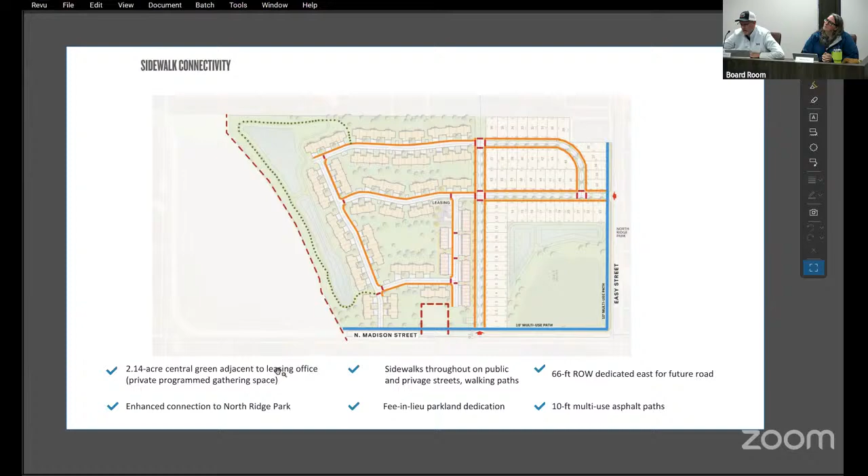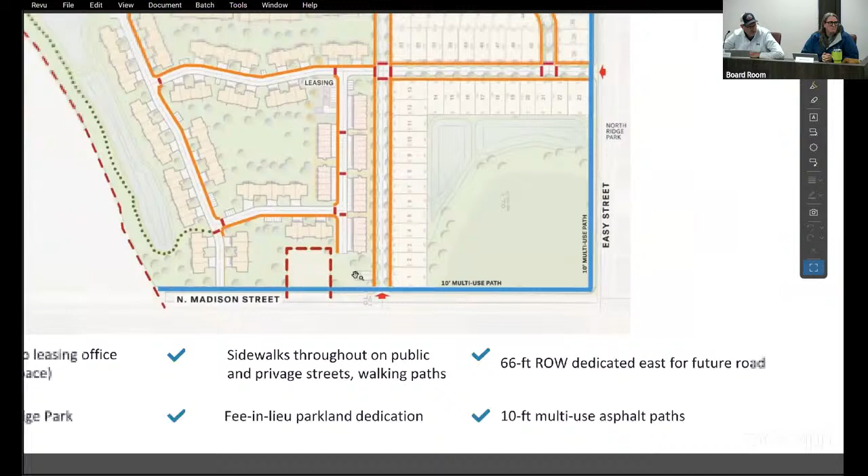Couple of questions I have: there was comment about the lift station. Do we know where on this plan the lift station is going to be? It's right here. Okay, and that's supposed to provide additional capacity to the north and east, right? That's correct.

There was a comment, I think Lauren made it, about sanitary sewer going along the northern buffer there. It's by the trail, up here, and it runs along the stormwater. Is it there or along the north edge? You can't see my mouse, sorry. Is it like here? There's a future line that almost runs where the trail is, the dotted line, that's the sanitary.

Is that going in as part of this project? Yeah, it is. Everything's being put to the property lines, both north and east, for future connectivity there as well.

One of the points, and it looks like you covered it, is the improvements to Easy Street and Madison Street. Is Easy Street a full improvement or just a half? Our side of the right of way. And the same on Madison? Correct. And that's all curb and gutter, urban section? Yes, right Lauren?

The other side of Madison and Easy will be a rural improvement, so the full road will be improved, but just the side on their development will be urban, curb and gutter and sidewalk. But the whole road will be paved? Correct, redone, okay.

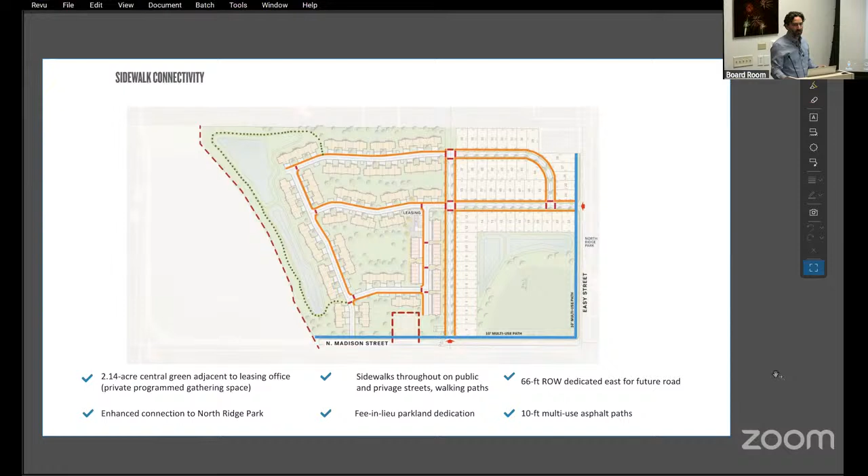How do those details get addressed? This will come back to the Plan Commission for an SIP, specific implementation plan. So this is just the preliminary plat and the rezoning. Sure, okay, do you have a preference for that?

Well, of course I do. I think for uniformity you'd run your sidewalk all the way through and just put your driveway cutout in there. To me it would make it more aesthetically pleasing, plus it's probably going to be where people want to walk more. You talked about getting people and the community together, and that's going to help with that.

Last question I had, I think you've done a really nice job improving this plan, and I like that you hit on some of the things we talked about last time. You mentioned the townhomes and their visibility to the street side of the public street. What are you going to do with the couple of units on the backside?

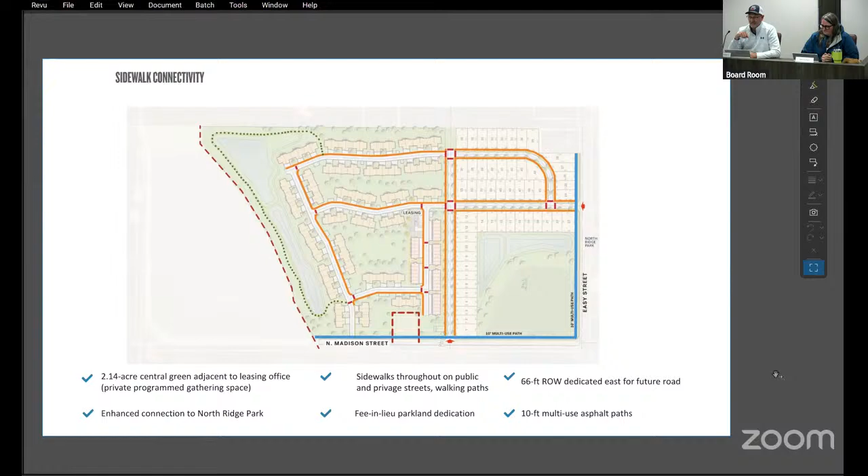So the rendering that I showed, it'll be identical. This side of those townhomes will be identical to the side facing the public. So they're going to have more of an open view to the green space. Yeah, those will be fantastic, open, and they'll have their front doors open to the green space, correct.

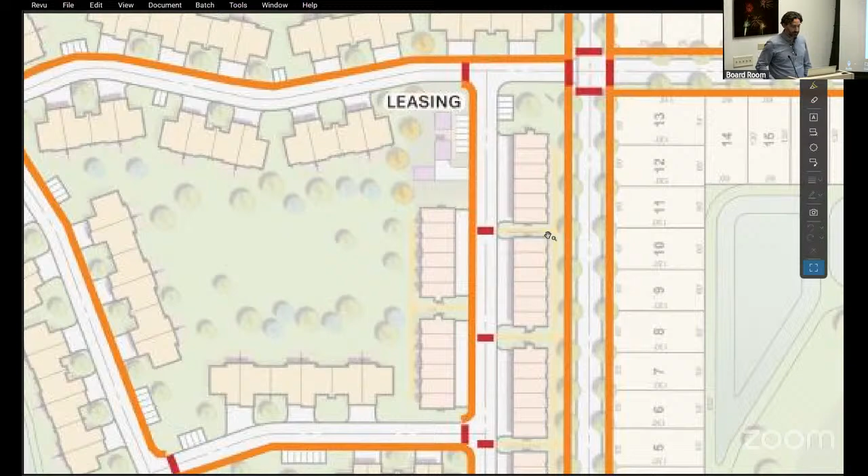All right, no, thank you. All right, Chris?

There's a lot I like about your project, and there's some things that I have significant challenges with. This is me, so I'll be a little different probably than the rest of my planning commission members. I like the changes you've made, I think you guys have done a really nice job implementing those changes to what we asked for. So that's great. I'm really happy we got the paths, or sidewalks, on Easy and Madison. I think that's great.

In your opinion, what do our existing residents get from this addition, other than more residents to our community? Well, they get a type of housing that I think is not existent currently in Waunakee. Not those people that are coming new, our existing residents. As we've added subdivisions in the past, there's always been amenities within that the whole community would use.

I feel like with the changes we've made, we've kind of closed off your property, if that makes any sense. The paths, I don't see people coming up here to use the paths in here. I think it's gonna be for the people that live here. I don't see people going up there for that. I don't see Easy Street being an easy thing to cross. And to Lauren's point of, we have North Ridge Park, North Ridge Park is still 3 blocks into the subdivision away from this. It's not right there at Easy Street.

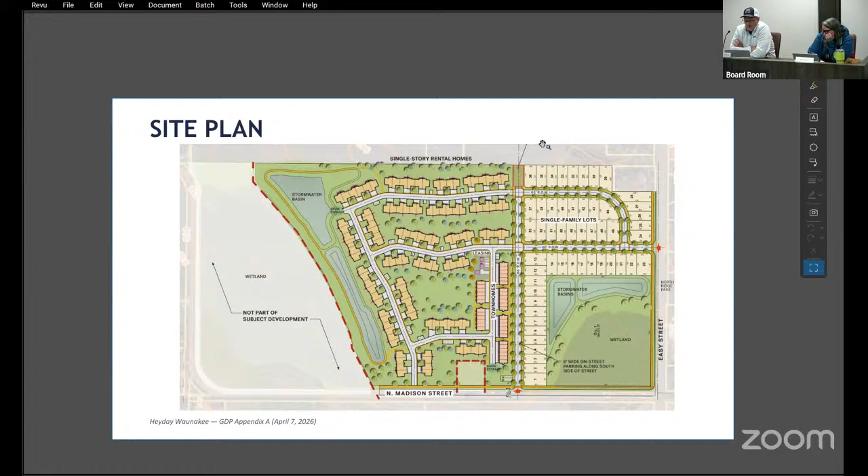So based on the first demographic that you talked about, where do you see those - I'll use the word young families or new families - where do you see them entertaining, having been through that?

In this development, are you expecting activities outside their home? Like walking 3 blocks down to the park, and that's where they're going to have activities, or is it outside of their home?

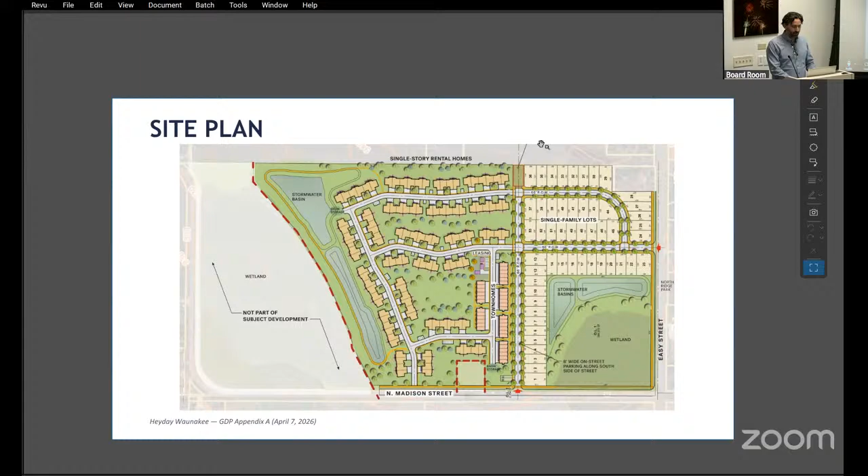Well, almost 60% of this site is green space, so there's tons of space for people to do things. If you look at our project in Oak Creek, we have garden courtyards between buildings, roughly 90 feet on average. They're deceivingly small on this plan, but they are big spaces, and there are people outside in these spaces all the time at our existing communities. Each home also has a substantial covered back porch and extended patio beyond that, so there's a lot of private outdoor space in addition to your home. It's like your living space expanding outdoors, and the fact that it's both covered and extends into a patio is meaningful.

Yeah, and I apologize, I think you're misunderstanding me. When my kids were young, they referred to it as the red park and the green park, because those were the colors of the parks they went to at the Arboretum. That was the activity - you'd walk down a block to get there, and that's where the activity was because it was in the neighborhood.

I think that's where some of the points are coming up - especially if that's going to be a demographic that occupies a healthy portion of this, what activities will be available with what you've laid out here for that type of activity? Or is it the three block jaunt across Easy Street and down Madison to get to that park?

Yeah, I mean, our outdoor space is right next to these units, there's a lot of open space. I'm going to bring this up so we can see - this is the site of our development. It's all right here, so here you're at Easy, and the park.

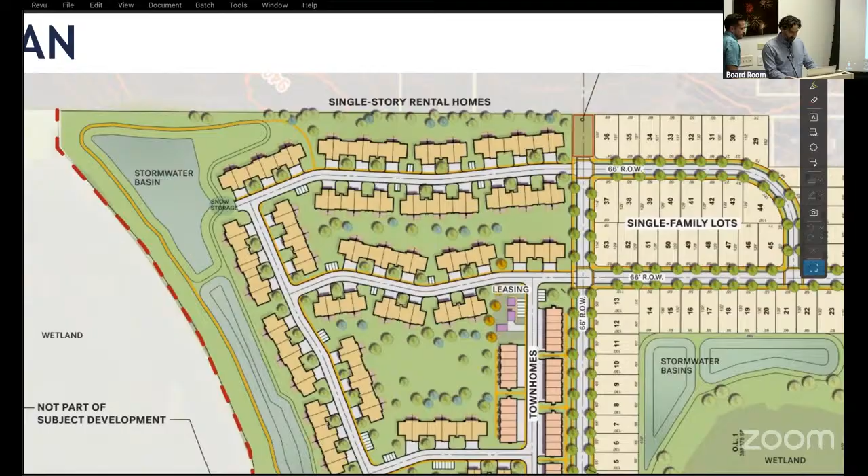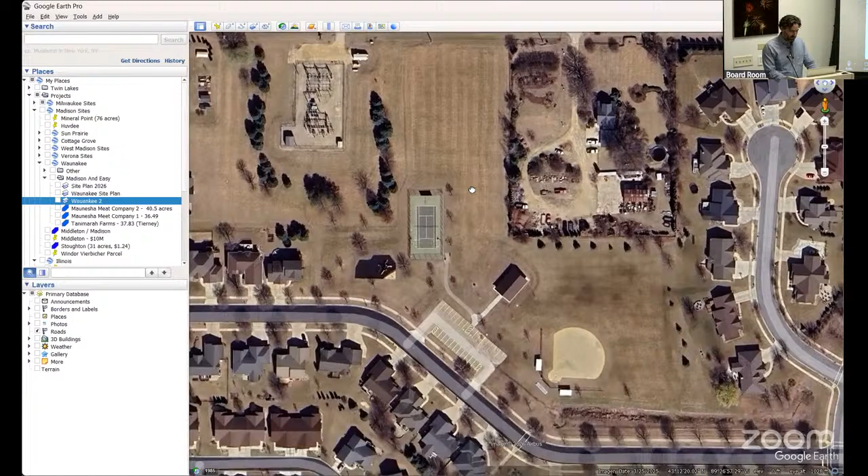Okay, so our single family homes will be right up here on Easy Street. This is the park, directly across the street. So I don't think it's as far as you think it is. The ball field's here, here's the tennis court, and access is going to be right off of Easy, so I imagine this is one block away.

And Lauren stepped out - Todd, maybe you remember, I think as part of what we agreed to do, we're enhancing the crosswalk across Easy. We agreed to do something that was requested, so that will be an enhanced crosswalk that gets you across Easy directly into this park. So I imagine this is where people will go if they want active park space.

Otherwise, there's 8.4 acres of open space within our community, right outside front doors, right outside back doors, and a 2.14 acre space that we can program and activate if staff felt that was necessary. So I think there's a lot of opportunities here for people to be right outside their front door, very close by at park space or active green space.

Do we have plans to put a pedestrian entrance on Easy Street into that park? That's where they put in the suggestion, I think. I think that's where they were suggesting there's a path there, right? Yeah, I believe so - Lauren picked the wrong time to step out.

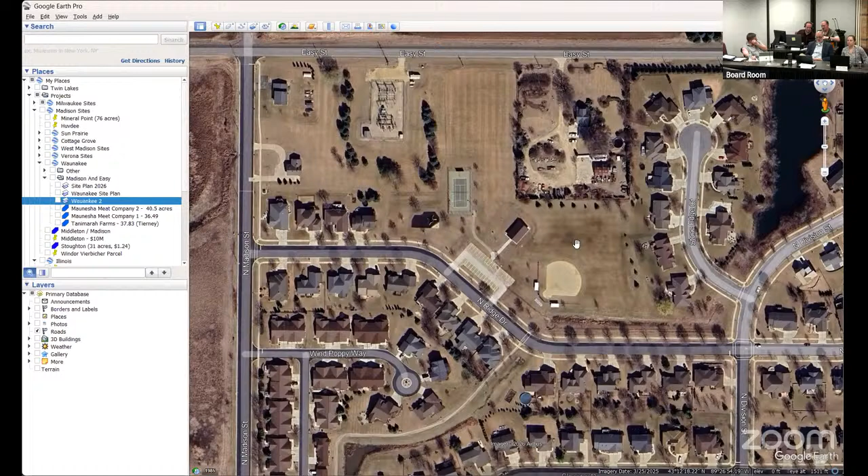Yeah, and then I think we had talked about those rapid flashing beacons at that crossing. So if we needed to put a couple parking stalls in there for people - because I sometimes would drive to the park that was a block away, I'm admitting my laziness. But on the side of your development, on Easy Street, if we needed it, I mean if you're saying they're going to access this park, it's possible, but there's not a sidewalk on that side of Easy Street. They're going to access it through here, I imagine, and then come in here.

Would you be willing to participate in some of the cost for that? I'm willing to talk about anything. We think there is substantial open space in parkland, both within our community and already established across the street. So if we have to help provide enhanced access, then yeah, we're absolutely happy to talk about that. We're not trying to turn our back on park space.

Before you change the topic, I guess my point of confusion is I'm viewing this as a multifamily development and a single family development. Do we require playgrounds at apartments or anything? One could argue 140 units in an apartment, and one stat we used to use in planning was the divorce rate, and that's the first place a parent with kids goes. We're not forcing them to build a playground for 140 units. So I was wondering if there's a requirement in multifamily for a playground.

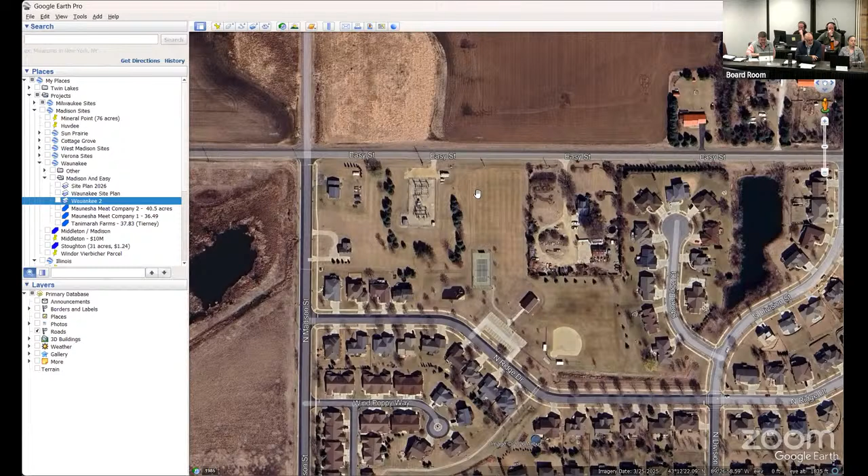The park in-lieu fee is determined on acreage, correct? Correct. So looking at this type of development versus your typical 3-story multifamily, which may sit on 5 acres or 6 acres or 15 acres at most, this is a significant amount of fee in lieu going towards the current parks that are currently activated.

We've tried to work with the Parks Department to a certain degree as far as how they would activate these spaces, and it seemed more of a nuisance as far as they wanted these to be recreational for basketball, for pickleball. So to have pickleball in the backyards of our residents is a tough pill to swallow. But just as far as the fee in lieu goes, it's a significant monetary amount.

Lauren, do you have that amount? It's 346,000-ish. All right, so I think that's a good point.

Thank you, Anthony. Despite the fact that you've never had a development this size, I would probably say the $350,000 payment fee in lieu is probably the largest fee in lieu that you have had as well.

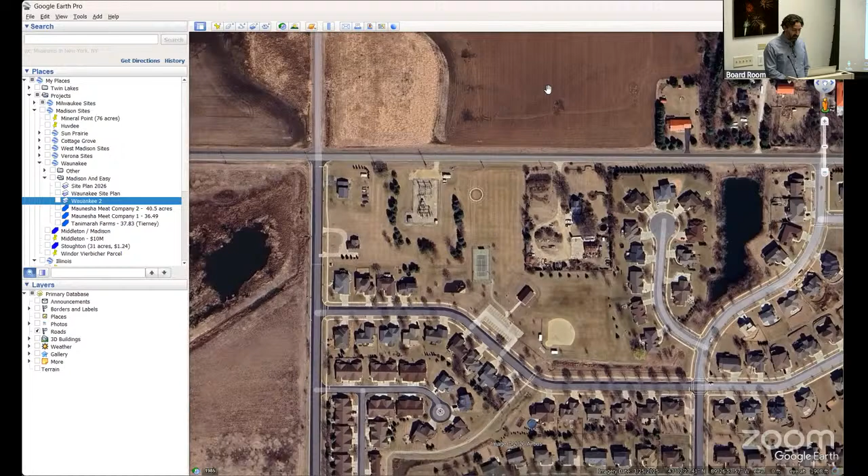So that goes a long way to supporting existing parks. And that was part of the discussion. It's not as though there's not a park across the street from here. I understand we wouldn't even be proposing this if there weren't parks nearby, but there's a park across the street, and there's also the park down here.

Yeah, I totally understand that. You know, the earlier plat that we saw did have the private park, which was more open space accessible to the whole community. For me, that's one of the big changes.

And we talked about how you didn't want that activated with pickleball, because people would call and complain specifically about pickleball. And presumably they would if there was any other court sport happening late at night, and how else we could potentially be activating that space.

So for me, the change is that this was private, but we would let the community use it. Now it's private, surrounded by homes, which even to somebody who's pretty bold, and I tend to be pretty bold in those spaces, would feel like not a space that I'm entitled to go into or comfortable using.

Where are we, Brian? What are our choices? So, yeah, I mean, you have before you tonight recommendations on the plat and the rezoning.

I know we always try to accommodate developers' timelines if we can. The statutes allow us 90 days, the board has to act on the plat within 90 days. It looks to me like the date on the plat is April 7th, so you definitely have some time from a statutory standpoint.